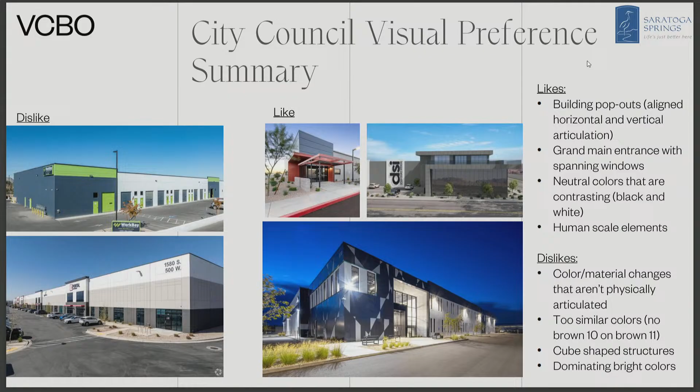Some dislikes were color and material changes that aren't physically articulated with the building. So on the left there, you can see how it's a flat facade, but they're changing the material and color. It doesn't quite have that standout effect as some of the other buildings. And then colors that were too similar and don't stand out was another thing to avoid, as well as cube-shaped structures and dominating bright colors.

So then moving into the building articulation, this is more of the architectural features of the building. So we have the primary facade, which must be horizontally articulated every 50 feet, again this is coming out from the primary structure. On the sides, this is increased to 75 feet. And then on the rear and loading facades, it increases to 200 feet to allow for that distribution activity while still providing some visual interest.

Some examples of forms of appropriate horizontal articulation include facade step in and outs. So for facades that span more than 200 feet, that's going to be 3 feet, and for facades under 200 feet, it needs to pop out at least 2 feet. Corners must be highlighted through a minimum 2-foot projection outward and upward, and we'll go over the vertical articulation on the next slide. And these must be at least 30 feet in length on the corners.

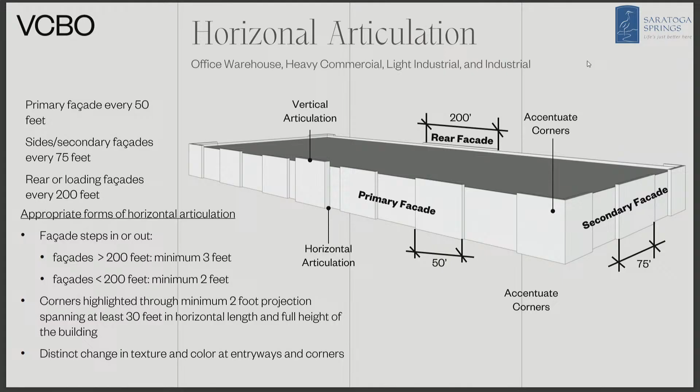So moving on to building height and rooftop features. The roofs shall be flat. This is a general applicable thing for these types of developments, and they shall have parapets, which is a slight wall raised around the main roof, and these should be sized to visually obscure any rooftop equipment that may be on top of the building from the public right-of-way.

We are also standardizing a 2-foot vertical articulation along with the horizontal articulation. So everywhere the building is required to be horizontally articulated, it must also project 2 feet upwards, creating an effect where it looks like a portion of the building is popping out. Lower roof elements are also encouraged, and they are required over main entries and any occupied rooftop spaces, so anywhere pedestrians are likely to be concentrated or a more trafficked area will have some of those shade amenities.

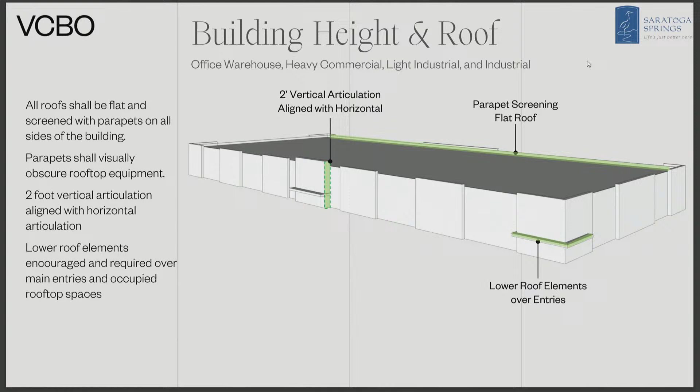Now looking at the building entryways, we want the building entryways to be clearly identifiable with distinct materials and design features. So if there's multiple entries for a building, these should each be distinguishable from the site entrance or from where people are accessing the site.

We are also standardizing an amenity zone. So in front of each of the building entryways, there must be a paved area at least 15 feet by 30 feet, and this will include site amenities such as seating, decorative lighting, and landscaping, depending on what the developer decides.

We are also standardizing several things for each entry, including the parapet or wall elements, awnings, canopies, or other rooftop elements that extend at least 3 feet outward, providing shade for the entryways, and a distinct material and decorative lighting at each of the entryways.

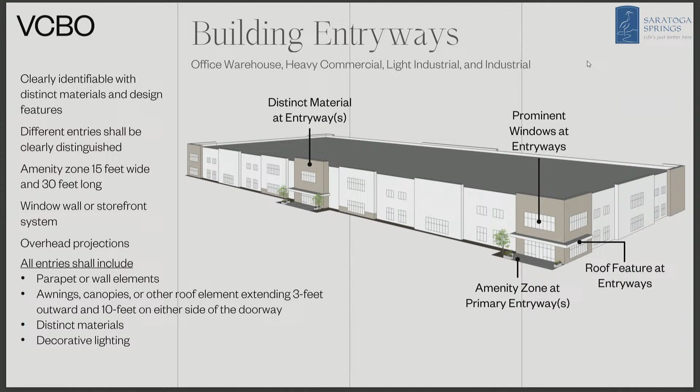For windows, we're looking at large glass windows on the ground level and smaller windows generally for the upper floors. Opaque, heavily tinted, and reflective materials are prohibited on the ground floor to avoid glare impacts onto the right-of-way. Facades fronting a public street will require 25% glass on the first floor, as represented in this diagram, and 10% on upper floors.

Corner lots or a secondary street-facing facade would require 15% on the lower floor and 10% on the upper floors. All facades, including the rear-facing facade, will include a minimum of 5%.

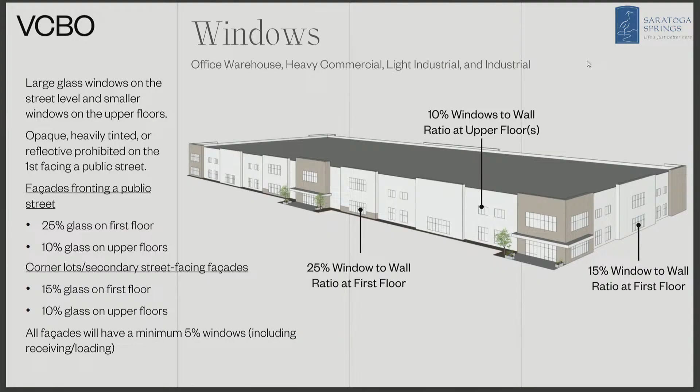Now getting into building materials. The primary facade must be covered in at least 20% of a high-quality material, such as brick masonry, natural stone, or architectural metal panel. Other facades will have to implement 10% of one of the following: masonry, high-quality concrete, tilt-up concrete panels that are finished and treated, or other architectural metal panel.

No more than 75% of any facade shall consist of any one material or color, and no more than 20% of any facade shall be clad in corrugated metal. Articulated corners and entry features will include that distinct color or material that's chosen and will be highlighted, as the diagram shows.

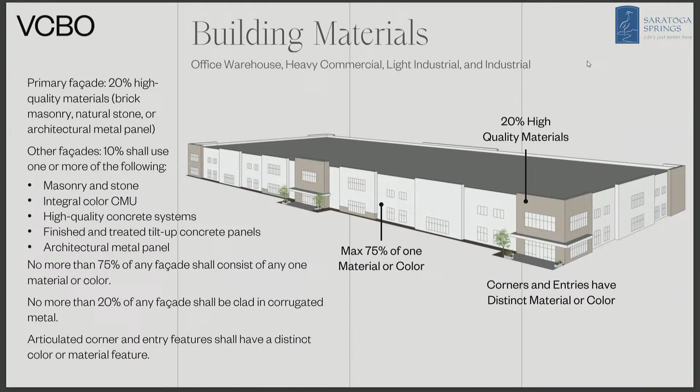Wrapping up here is the primary and accent color application. As stated by the community and city council during our visual preference survey, they preferred a neutral palette overall, but with contrast in color. So we have tan here compared to white, as opposed to different shades of tan or different shades of gray, giving a bit more contrast.

Accent colors may not be applied to more than 8% of the building facade, and they must also be complementary to the materials and colors used on the rest of the building. Artwork, signage, and awnings are exempt from these limitations as permitted by the Land Use Authority.

So now if there's any questions or discussion, I'll open it up to that.

All right, Commissioner Karn. I have a few. You said there has to be contrast in the colors. Is that in the eye of the beholder, or is there a clear definition? So we looked at the definition.

I think it's a tone difference. We could get a little bit more specific and see if there's some way to measure it, if that would be helpful. But for the most part, I think it will be in the eye of the Land Use Authority when the developer is presenting those color palettes and material palettes for them to determine if it's contrasting.

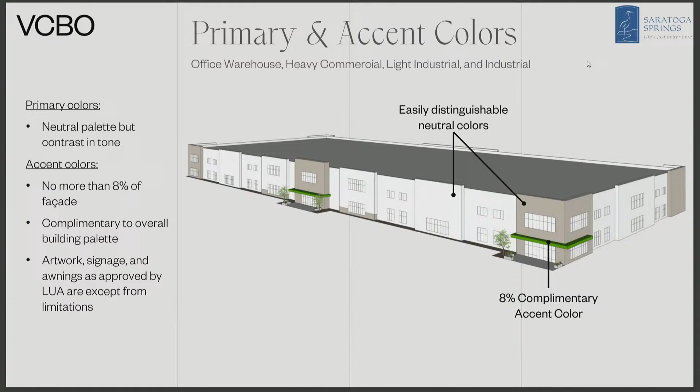Okay, and then I saw that there was a desire to have a grand entrance feel. I saw a requirement for amenities at the entrance, distinct lighting, a 3-foot roof element. Would those apply to the pictures you showed, or were the pictures of likes and dislikes more grand than that? So yes, some of the images shown were of a higher caliber, I will say.

Those are a little bit more expensive for the developer. What we're showing in the renderings is the bare minimum. So this amenity zone shown here is a 15-foot width minimum, but the developer could go bigger. And in addition to what you stated, I would also say that the expansive storefront windows required are another kind of entrance element.

Okay, and then why less windows on the second floor? Just because they're not as useful there. We want to show that there's more visualization and transparency and fluidity through that first floor. It's not as necessary for the second floor, and often some types of these buildings don't even have an upper floor.

Okay, and then I saw you said 5% windows on the rear. For an industrial building, do windows present a safety or security risk? Now people can see in. Yeah, so in our example here, on that back facade entirely, we do have them located higher up so that they're not within those distribution direct loading zones, so that could be achieved in this way.

This is for a loading type building, but this applies to any building more than 20,000 square feet, is that right? These standards are specifically for industrial and business. Okay, so there's going to be loading doors most likely. Mostly, yes. And then why invest on the rear of the building? Would we rather have them spend their money on a grander entrance versus the rear of the building?

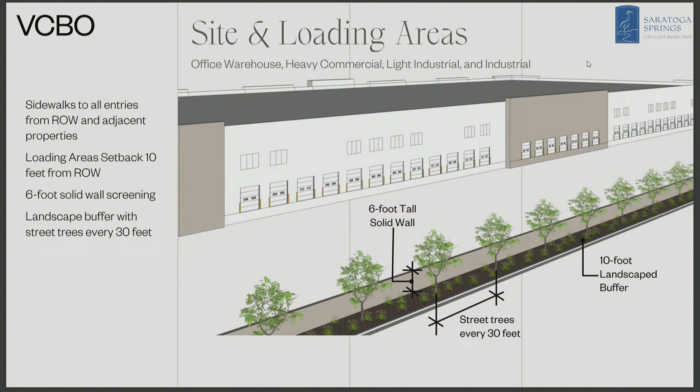Right, that's a good point, and we could consider it on a case-by-case basis. I think what we are considering is the four-sides architecture in the case that this building could be fronting a public right-of-way or some other development where it might be visible. But we could adjust that standard to consider the lot placement and what it's abutting.

Okay, maybe my question for city planning, how often do we have the rear of an industrial building facing a city right-of-way? Is that a common thing? We have that in the city now, you can see the rear as you're driving by. Okay, yeah, so we do care about that.

Okay, thank you, that was all my questions. Thank you, Commissioner Karn. Commissioner Mangum. Oh, thank you so much.

So again, this kind of goes back to my profession, and who knows if it'll ever happen. I would love to own a big, fancy, massive warehouse where just baseball's trained inside. So when I look at this type of code, I think to myself, a grand entrance makes sense to me. I want people to know where to go when they're coming to the building. But then I start to think, with all these changes, what was the standard and where are we at now?

And are we increasing the cost for somebody to build? The articulation, making it pop in and out like that, it seems like a waste of money unless there's a way to do it without increasing costs. And so that's the question in my mind, is it increasing costs?

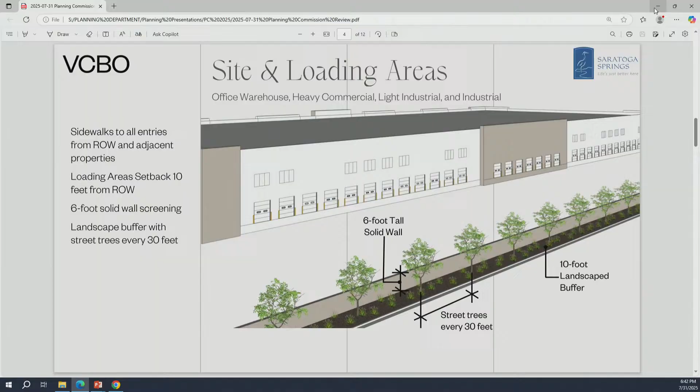All right, so with that said, I will go ahead and entertain a motion. I'll make a motion based upon the evidence and the explanation received today. I move that we forward a positive recommendation to the City Council for the proposed amendment to Title 19 with the findings and conditions in the staff report. Can we add to that we just include the comments from Commissioner Mann as well for consideration? Thank you, I thought they were great comments. I agree. So we can add that to - yeah, you need to make a formal motion.

You need to, can you address how they do that? Sorry, you need to make it formal. Yeah, so Commissioner Hill, you have to say with the amendments. Okay, so as I read, with the findings and conditions in the staff report and the testimony that was given by Commissioner Mangum and Commissioner Mann on the cost, we just want to send that off to the City Council also.

Is that what this would be on, the proposed revisions to Section 5A? Okay, to I, 5A and II. Okay, Commissioner Mann recommended that exterior downspouts be allowed to be different materials and more visible. Okay, just to remove I and II, I think. Yes, yeah, that's specifically 19-16-07, 5, I, and II. 5A, I, and - true, I missed the A, yep, you got me. Okay, do we all want to redo that one? Okay.